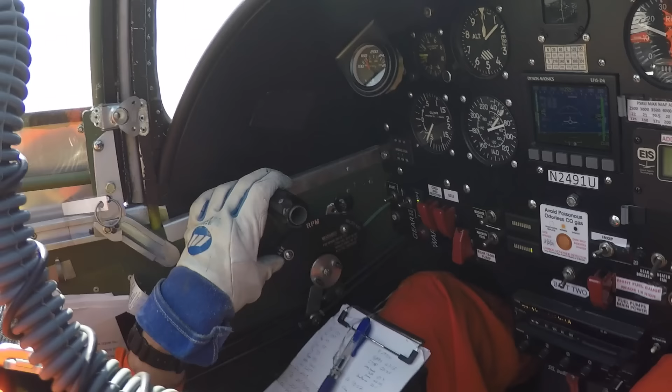After an easy one hour flight, I returned to the Compton airport for a landing in the Audis Titan Mustang. That's when the gear collapsed on landing. I was able to catch it, power up, and go around. Before I could get the gear to relock, the engine quit, and I had to dead stick the airplane with the broken gear back into the Compton airport.

I'm Elliot Seguin. Let's talk about how this happened.

Alright, welcome to the Audis Titan program debrief video. I apologize, this is a really long one, we're trying to fit a whole program into one video. The program ended in an incident at the Compton airport, but in this video we're going to go all the way from the initial connection with Jim Audi, the owner of the airplane, through the three flights in the airplane, and then finally the incident flight. I recognize this video is long. If you have to use the timestamps, please do, but I think coming along for the whole journey will help inform how we ended up where we did. Thank you for coming along.

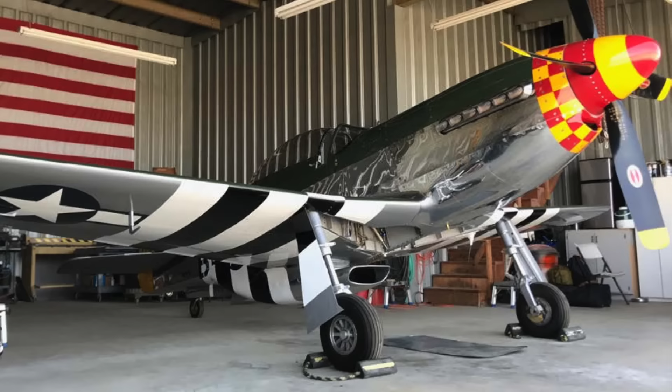The Titan T-51 Mustang is a 3/4 scale Mustang replica designed by John Williams of the Titan Aircraft Company in Austinburg, Ohio. You may recognize the name Titan Aircraft from their line of Tornado ultralight aircraft. The ultralight roots are strong in this airplane. Of the Mustang replicas I've flown, three, the Thunder, the Stewart, and the Titan, the Titan is by far the most practical entry into this class of aircraft. The aircraft is made up of a steel tube fuselage covered in aluminum and an aluminum wing, with fabric covered control surfaces. According to the FAA registry, there's approximately 60 Titan Mustangs, the bulk of which are Rotax powered.

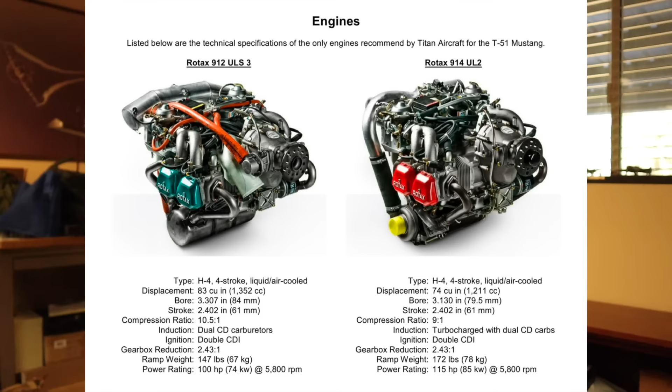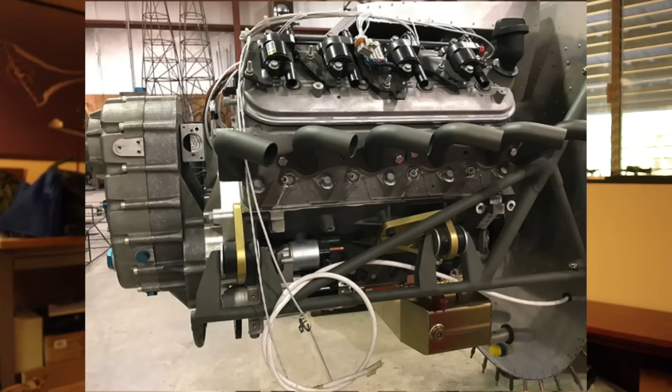The Suzuki V6 was the initial power plant for the airplane. Again, I'm not an expert, if you want to know more about the Titan, go talk to Titan. But from what I've gathered, the Suzuki V6 is the engine that started the kit off. A lot of them ended up flying with a Rotax, and the current engine of choice is the LS Chevy V8. This matches the history of this aircraft, which started out with a Rotax, flying approximately 100 hours with that engine installed, and then the 350 horsepower LS3 was installed for the last 40 hours or so of the airplane's existence. The LS installation is automotive in its engine controls, both the fuel injection and the single plug ignition being automotive and non-redundant. This means the electrical system is critical for the engine to keep running, which is a concern. But in light of 40 trouble-free hours from an engine management standpoint, I believed the risk was reasonable.

The LS swap was done at the Titan Aircraft Factory by John Williams in Ohio.

We were first approached about the airplane while it was still in Ohio. The owner, Jim, purchased the airplane and was looking for a way to move it from Ohio back to California. Jim is not a pilot, this is the first airplane he's owned, and this was sort of an outside-of-the-box purchase for him, so he was looking for some help. We were pretty busy at the time, and there were plenty of people that wanted to help with the project, so he found other folks to help him get the airplane moved from Ohio out to the Compton Airport in Los Angeles, where it was flown a few times before we were brought on board. Some of those flights are documented on Jim's YouTube channel, I suggest you go check it out.

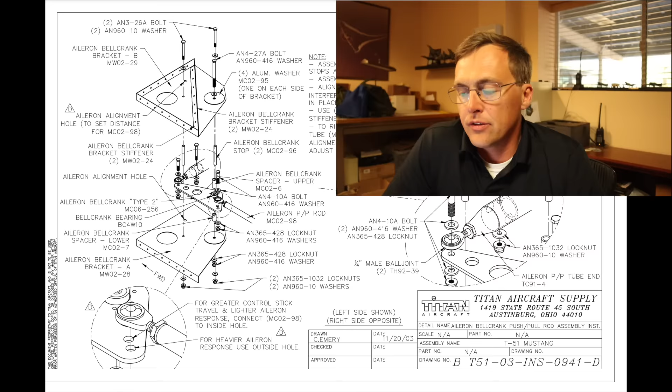So a quick summary of some of the issues found during the inspection. First, the right aileron bell crank bolt was found to be loose. The bolt was shanked, so we just had to add a washer.

Second, the right aileron trim servo was loose, some hardware that needed to be tightened. The elevator hinge bolt was not tight in the nut, so it just wasn't going in long enough for threads to be poking out the far side. Again, simple fix, just a thinner washer, and now it's secure.

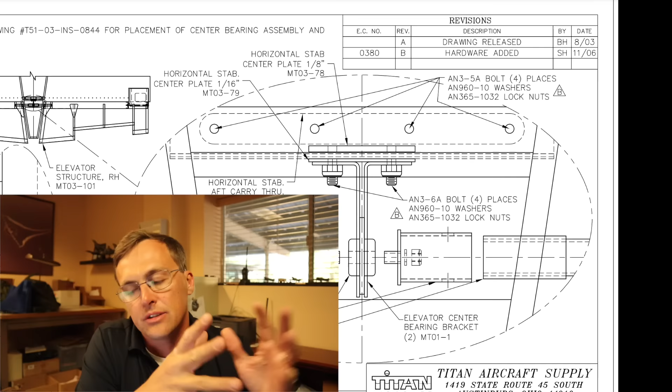Number 5 was the canopy lock on the crank was not functioning, so you could crank the canopy shut and hit the stop, but there was nothing holding the canopy there. Most of these Mustang replicas, just like a real Mustang, have a crank on the right side of the cockpit, and the crank itself ends up functioning as the lock. So you'd get to the spot where the canopy comes closed, and then you release the lock, usually some sort of a pin. In this case, that detent wasn't functioning.

There was a backup latch where the two frames came together on the canopy rails, like you'd see on a suitcase, that you could close, and that was actually what was holding the canopy shut. So we squawked that. The shoulder harnesses were just a simple loop, going from the lap belt up and around the top of the seat and back down the other shoulder, and as a result it just sort of fell all over the place. So I squawked that it needed to be secured.

The manifold pressure gauge was sticking, so we just replaced it. In briefings with other pilots, it became clear the flaps were an issue on the Titan Mustang with the V8 installation—more of a forward CG thing than a V8 installation thing. There was no indication of flap position, so with feedback from other pilots, it was really important not to put in too much flaps. Since I had no indication of flap position, we squawked that.

People got really excited about the flap indication marks on the Hawken Lancer, so we went through how we marked the flaps. The big thing here is putting a mark on the flap itself that needs to be visible from the cockpit. So I'm sitting in the cockpit, and Jim is out on the wing with a protractor, setting a new zero since the airplane's in 3-point.

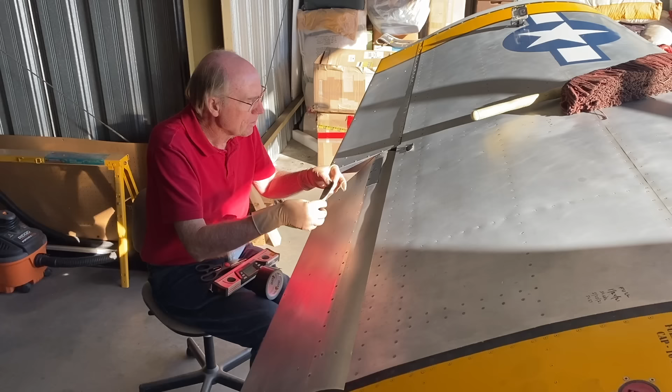Here you can see Jim putting down a piece of tape that corresponds to each of the 10-degree increments. A little further back. Other than that, pretty straightforward. Right about there. Good.

Both the water temperature gauge and the PSRU oil temperature gauge were down in the footwells, sort of where your knees would live. These two gauges had to go. I thought I could work around them, but I can't, and with my gangly legs it wasn't working, so I asked that those be moved.

One of the more interesting findings was that if you walked around the airplane and looked at the two main gear, it became apparent the right main gear just wasn't pointing the same direction as the airplane. It was tweaked both in the roll axis and in the yaw axis. So I asked that the owner reach out to Titan and confirm that was within limits or acceptable. There was no reason to think that had happened since the airplane got to California; most likely it had flown from Ohio like that. I just wanted to make sure everybody was on the same page that the gear was considered safe before we went on to fly it.

Lastly, something directly related to the previous flights. When Ethan was flying the airplane, in both cases when the propeller ran away, it ran to a very, very high RPM. For those with experience with constant speed propellers, this is very much dictated by the fine pitch of the propeller. The rule of thumb is you put in as coarse a fine pitch as you can bear, so that in the event of a propeller runaway, you have as much power available as possible. So long story short, if the governor fails, the prop is going to latch to the finest pitch it can, which is set by a mechanical stop, usually up in the hub.

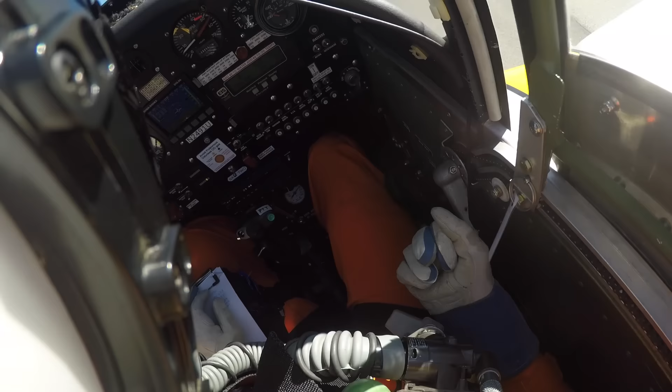After the run-up, controls check, and then call for the runway. Copy traffic, experimental 9-1 uniform, taking runway 7 right, high-speed taxi.

For my first flight in the airplane, I'm trying to treat it like an actual first flight. So that means starting with a high-speed taxi to verify the propeller operation, again without being committed to going flying.

With that high-speed taxi complete, we taxied back for the first actual takeoff. Copy traffic, experimental 9-1 uniform, clear to active. Fist pumps for Jim. Copy traffic, experimental 9-1 uniform, departing runway 7 right, we'll be staying in the traffic pattern, climbing up above the airport.

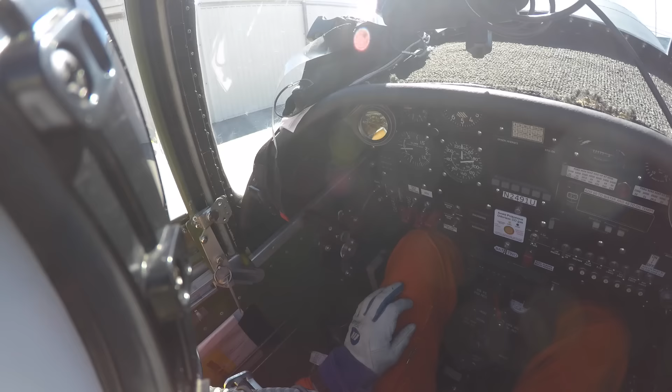Got back to the hangar, and I think this guy might be my favorite part of the whole program. I hope when I get to this point in my life I have an airport I can go to and hang out. This guy's got a 3-wheel bicycle and seems to just be cruising the airport, talking to people. He gets to be around airplanes all day, which clearly he's passionate about. He had lots to say, having spent what appeared to be a lifetime in aviation. He knew a lot about what's going on in aviation, which made him enjoyable to talk to. Reminded me a lot of myself, and hopefully, like I said, a goal of where one could end up in a best-case situation.

It's pretty good, right on the numbers. I watched you say you put it right on the numbers.

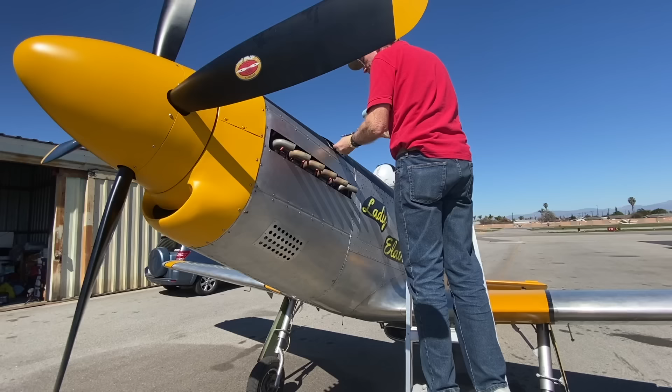Yes, so that first flight was 0.6 hours from chocks to chocks. That put us in the air for just about 20 minutes, so about 0.3 hours airborne.

With that first flight complete, we came back and checked the oil. Everything came down to the gearbox health, so we just used the dipstick to look for particulate in the oil. Of course, this oil now had 20 minutes of runtime on it, so it looked like very clean oil, but there were no signs of debris.

And with that, we started moving towards flight 2. In this video you can see Jim checking the engine oil. Yes, the gearbox and the engine oil are separate, and yes, we checked both.

So that brings us to flight 2. Flight 2 was basically a longer version of flight 1.

Again, the goal was to take that. Now we put 0.6 on the gearbox. We wanted to bring that up to an even 2 hours before we changed the lube in the gearbox. This was going with a new plan from the owner, from Jim. He wanted to make it a company policy that the gearbox oil was changed every 2 hours until he got confidence again in the gearbox manufacturer.

From my standpoint, the goal was to minimize the risk and stabilize the engine operation. So I didn't want to be sawing on the power and running weird power settings, etc. The goal was to get everything as stable as possible.

So 1.4 plus 0.6 equals 2, 1.4 hours from Chocks to Chocks, orbiting at 3,500 feet, which worked out nice with the airspace there over Compton, at a cruise power setting, which we were calling 3,000 RPM and 20 inches, and then one normal landing.

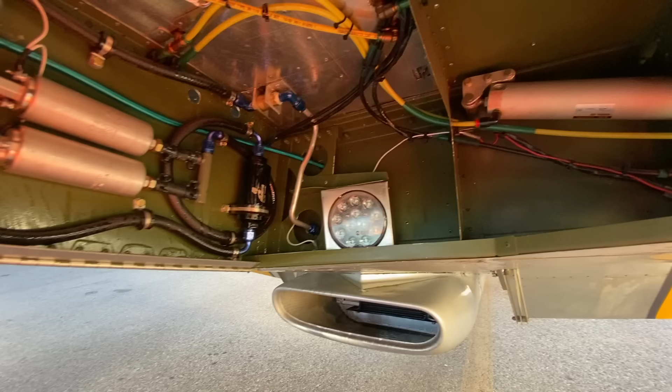Here's some footage of the belly of the airplane after the last flight. We didn't clean the belly in between flights, so that's all the oil that had accumulated through 3 hours of flying in one day. You can see a couple drips on the ground. There's a little bit of oil on the belly, but nothing significant. All indications that the airplane was happy and that we would be moving towards flight 4 very soon.

Flight 3 was 1.1 hours. I landed at 3:40 in the afternoon, again just giving me just enough time to get over the hill back to Mojave in time to give the kids bath and put them to bed.

Flight 4 was scheduled to be the last or nearly the last flight without Jim in the back seat. The gearbox seemed to be performing, and therefore Jim was looking forward to starting his training in the airplane.

Jim had planned on using the practice area up by Redlands Airport on the north side of the LA basin for that flight training type activity, but I had recommended the one off the south side of Torrance. They're sort of just off the coast, like you were heading to Catalina.

So as a result, on this flight, I headed that direction to check out the area. It was my first time leaving the glide cone of the Compton Airport, and there was no shortage of anxiety about that. Compton traffic, experimental 9-1 uniform, take runway 25 left.

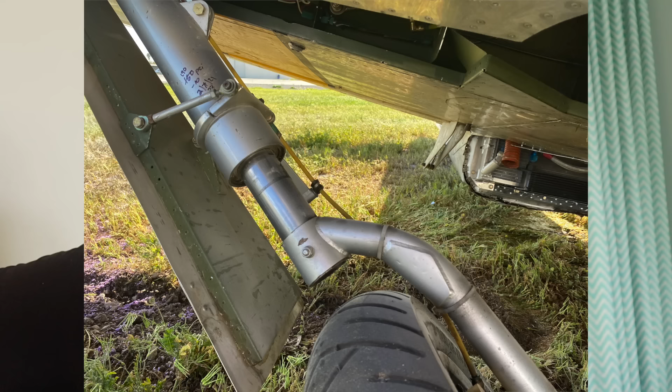Specifically two things: number one, why did the gear collapse, and number two, why did the engine quit. First question, why did the gear collapse? The short answer is we don't know. Talking to John Williams at Titan Aircraft, there has never been a gear collapse when the gear was down and locked. That would lead you to believe the gear was rigged improperly, and that's what caused the gear to collapse. The emergency started with it.

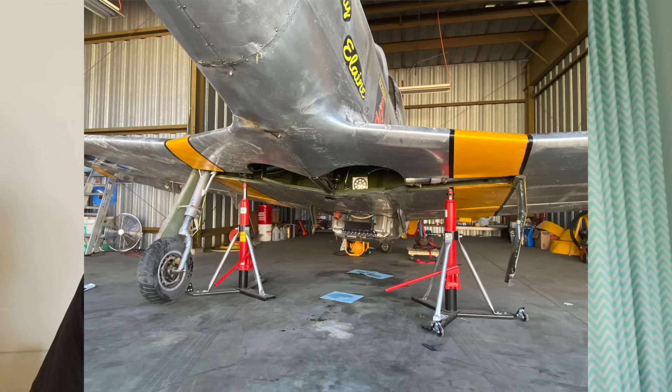It was an attempted landing. Just so we're clear here, I'm not here to assess blame. The NTSB has finished their investigation, the FAA finished their investigation, the insurance company has finished their investigation. I'm not here to assess blame, I'm not here to talk about who made mistakes.

They're airborne for probably another 15 minutes, during which time we scrambled Jim. That's Jim right there.

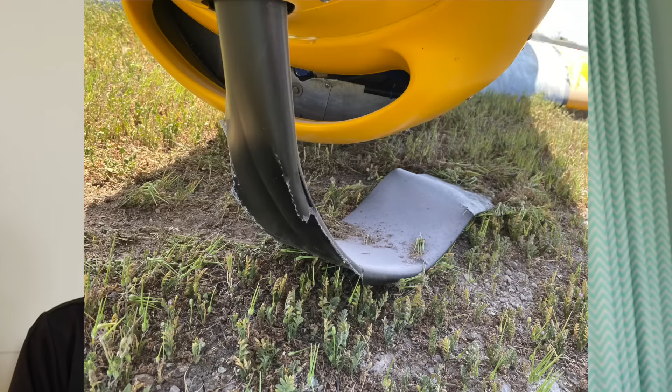So there's two people that touched the gear recently. First was John Williams during the engine installation at Titan. At the very least, whatever he did to the gear would have had all the landings it took to get the airplane from Ohio to California, which we'll say is 10 landings, plus Ethan's 2 landings, and then my 5 landings.

So that's what, 20 landings since John touched it. Got Jim on the radio just in time for the complete electrical failure. The other person that had touched the gear is the owner, Jim. Jim touched it in between Ethan flying the airplane and my flying the airplane, so whatever my 5, 10 landings, something like that, had all happened since Jim had touched the airplane.

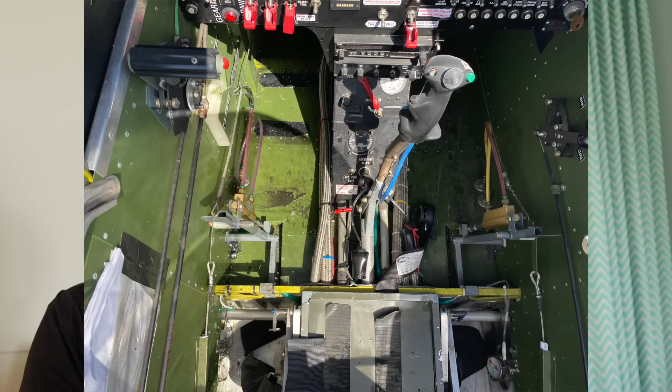So regardless of whether the problem came from the work that was done in Compton or the work that was done in Ohio, there were several landings after that work was done where the gear functioned properly.

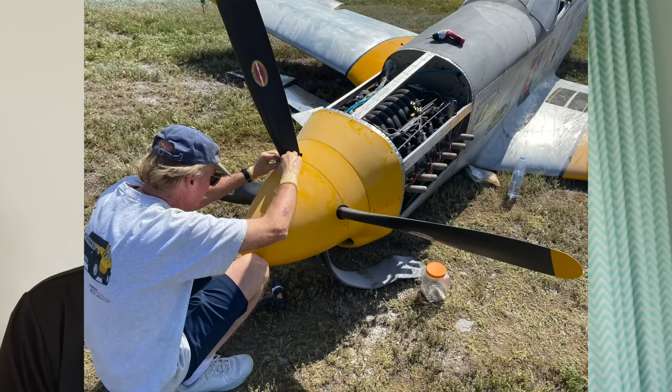So the short answer is that the hydraulic system took out the main bus, and the main bus took out the engine. Again, we've already talked about the airplane is non-redundant, so it's all automotive, non-redundant, electrically driven fuel injection and ignition systems.

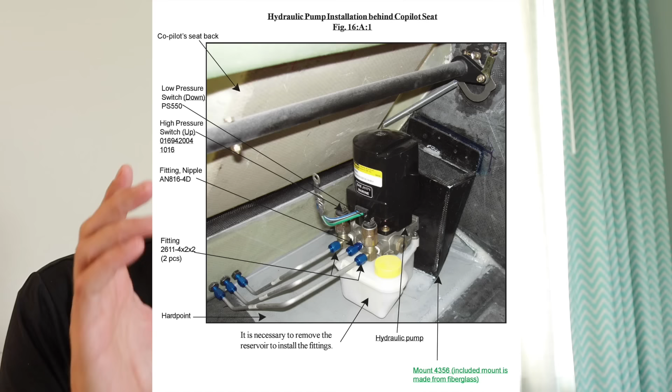In most aircraft that use the Parker hydraulic power pack, which is most home builds with retractable gear, they use the pressure switches that are installed in the power pack. So there's a high pressure switch and a low pressure switch. When the pressure in the system gets below a set point, the pump turns on, and then when it reaches the high set point, it turns off.

So, from my perspective as a pilot, when I saw that the gear had collapsed and I looked down and checked that we were at 450 PSI, which is the high pressure set point for the system, my assumption was that the pump had cycled off, but that it was holding pressure.

If the pressure had not built up, one would assume that the pump was on. Since it was at the high pressure switch limit, one would assume the pressure switch was off.

And it was able to hold the right main up for a little while, but it wouldn't take any pressure, so it pretty quickly collapsed. Once it collapsed, the wing dug in and spun around, went for a little bit of a ride.

The difference is that Titan turns the pump on and off, not with the pressure switches, but with the downlocks. So as soon as that gear collapsed and the light in the cockpit turned off, the pump turned on. And since the transition light, which is called out by the Titan plans, was not installed, there was no way for the pilot to know that the pump was running.

The main bus has a circuit breaker. The circuit breaker is not in the normal line of circuit breakers on that bottom row. It's above the master switch up on the top of the panel.

And that circuit breaker was set by the plans to be a 25 amp breaker. It was a 30 amp breaker, which is good that they sized that breaker up when they installed the big fuel pumps and the hydraulic pump in the airplane.